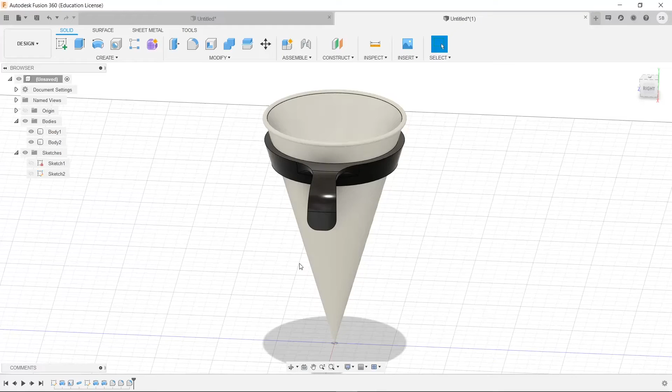Hey, I'm going to be showing you how to make this in today's video.

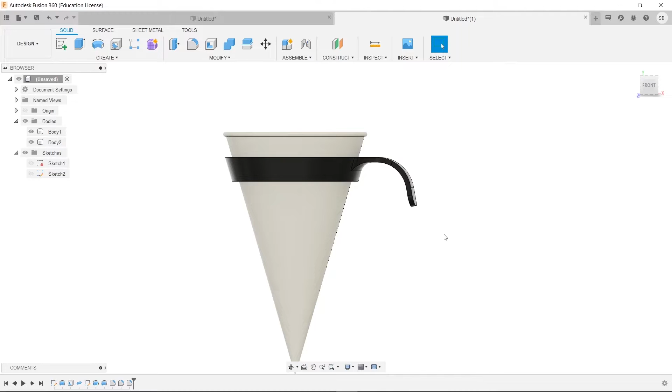Let's get into the video. Hey everyone, this is Stevie here, and today we're going to be making a handle for this paper cup. You guys have probably seen these before, and they are pretty annoying because they are super flimsy. So let's make a little holder with a handle that we can actually use with these things.

First, we need to actually make the cup itself so we can design it off of this. If we look at this from a cut from one side here, then it's just a triangle. That's pretty easy, right? It's a triangle with one side of 30 millimeters, and then a height of 100 millimeters. We don't know this length here, which doesn't matter, because what we're going to do is make the height.

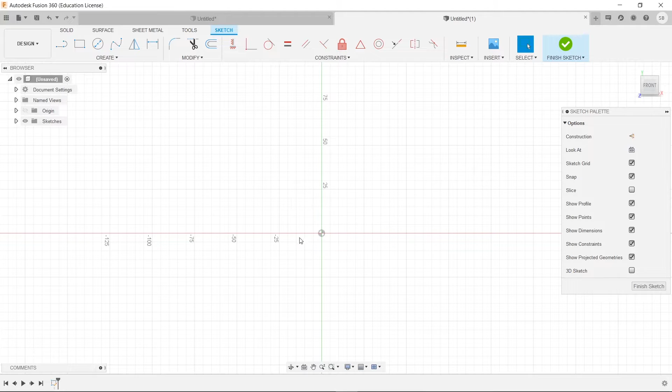Let's start at the origin. I just like that for some reason. We'll make this 100. We will bring it out by 30. And if I can click correctly, 30. Then we will finalize it by selecting here and here, and there we go. Now that is our cup.

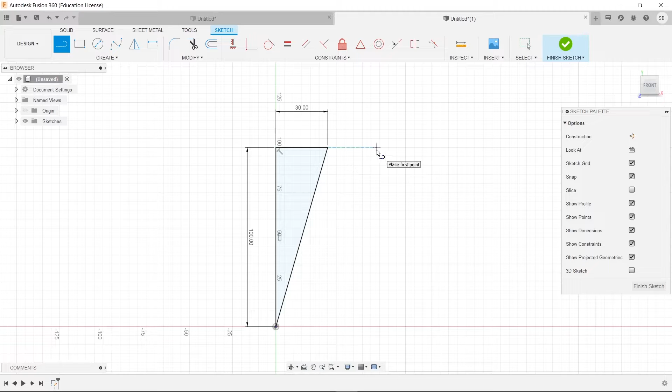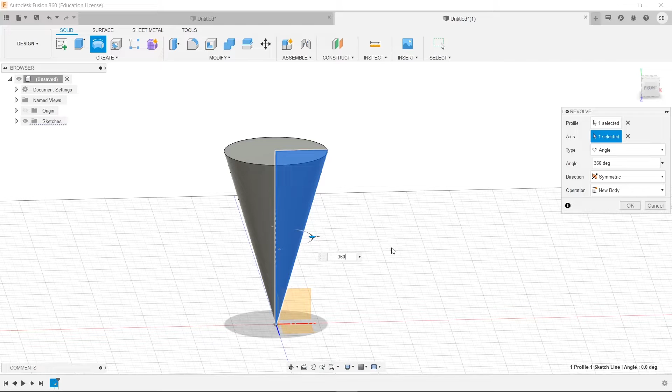Well, obviously not. There are a couple things we need to do before we can actually think of this as a cup, but we'll finish this sketch for now. Now we're going to click on the Revolve button, select here, and select the axis, making it this line right here. I'm going to select that, and we'll type out 360 degrees because that's a full rotation, and press enter. Now it looks like a pointy hat.

It's a cone. So what we need to do next is shell it so that it's a cup, not a cone. So we'll click here, and type out 1 millimeter because these things are super thin. It's probably even thinner than that.

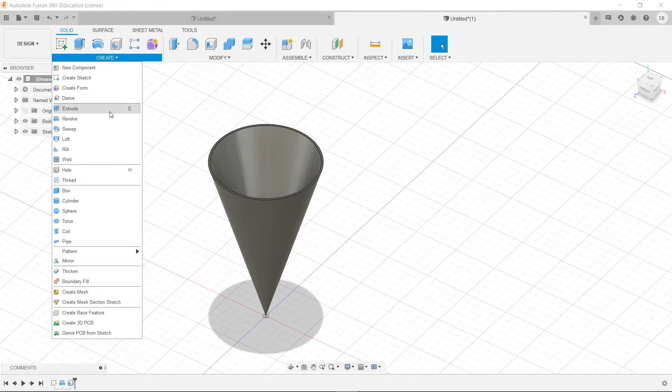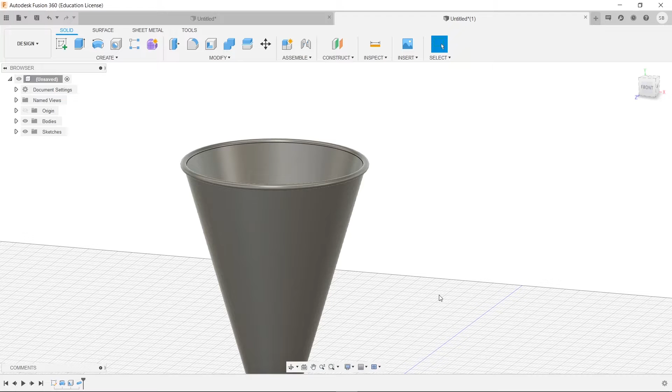Now finally we can make it a little bit more pretty by clicking on pipe here and selecting this path, whichever side, doesn't really matter. We want to join, so we'll join. And we want to increase it so it has a nice little lip there. That's pretty extreme, so we'll go to 2 and press enter. And there we go, that looks just like those paper cups now.

Maybe a little bit more gray, let's change that real quick. I want to make this body, we'll press A for appearance, right? Oh, there it is, it's already up there, it's just hiding from us. So we're gonna go down here, plastic looks good enough to me, so we'll make this plastic white. Perfect. So next thing we need to do is actually design the handle.

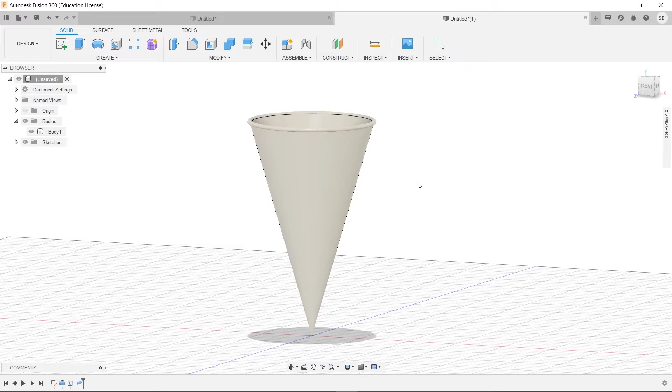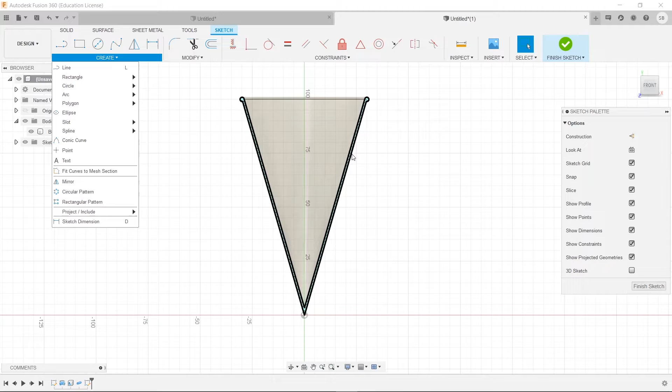I know the cup took like half a minute to do, but let's make the handle. So we'll create a sketch on this plane again, and we're going to click on slice here. This is going to let us see the midsection here because we selected it on a plane that's in the middle of it. So what we want to do, to be able to actually use these lines, is go here to project/include intersect.

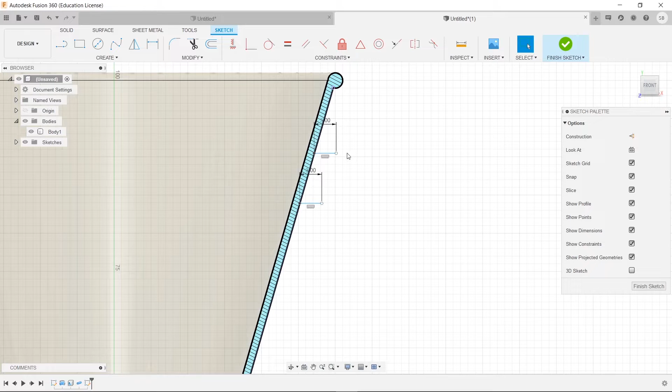Now we're going to select this, and that's going to allow us to use these lines to draw on. So what we want to do is go here and draw this out. Let's make this 3. We will do this one more time down here, make it 3 again, and then we'll want to connect these two.

So now that looks really short, so we're going to dimensionalize this. We're going to make this 10 at least. Now we could have just done this and made it so that they're both the same thing.

Oh, didn't take though. See that f of x right there? That is saying that this is a function of this value. So what's going to happen if we change this, then that one changes as well because it's a function of this value. Whatever this value is, this one will be it as well. So we're going to move that over there.

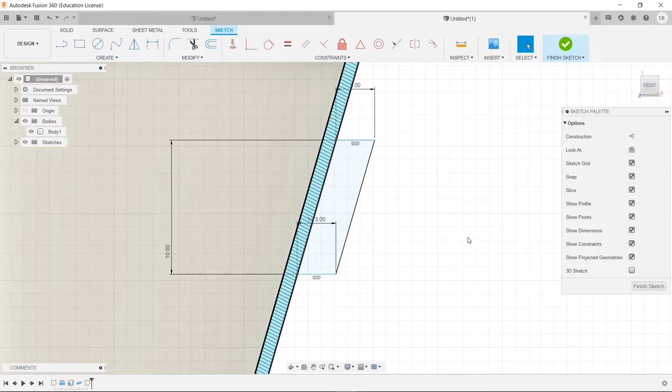Next thing we're going to do is we're going to create the actual handle, because this, you can imagine, just how we drew it as a triangle, this thing is going to revolve around and be the holder of it. And then we need to have a handle that extends from here so that you can actually grab it.

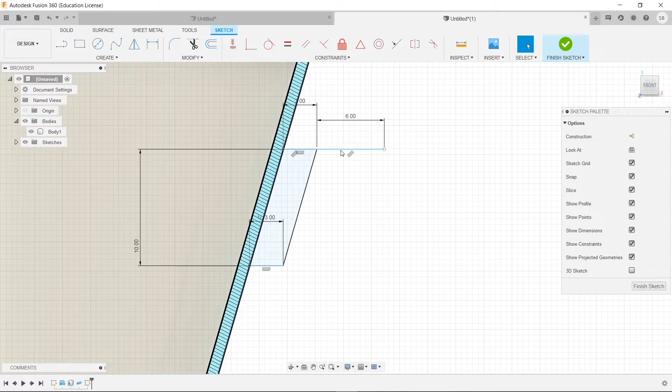So what we will do is type out 6, and then we'll click on a line again. And if you hold left click with line, I don't know if you knew this, but you can actually draw an arc. So we're just going to draw out an arc, and then we're going to make that arc tangent there. Actually, I don't like it when those things are tangent. We'll make that tangent later. So we'll draw him out there.

So next thing, we want to make the radius of this. Oh, not that, Control Z. I want to make the radius of this to be 15.

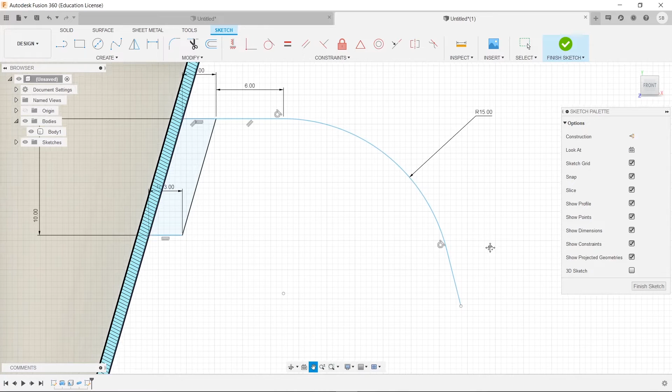Interesting, but we're going to make this tangent now. There we go. And I want to make the distance between this point and the bottom of it. Oh, nope, I was holding on tangent still. My bad. So we're going to make the distance between this point. We're going to make that 20.

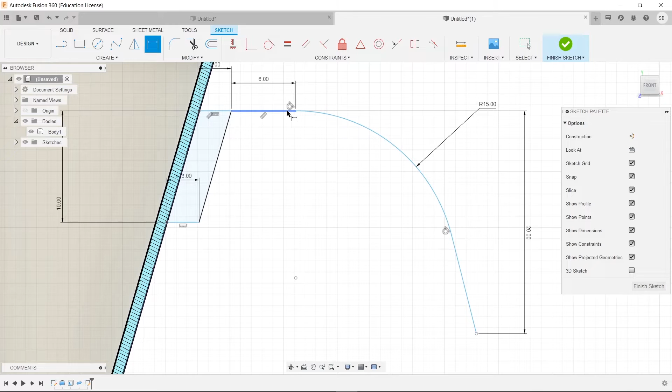And now we need to actually make the angle between these two. Let's make that 100, make it a little bit nicer. And we need to finish this off because it's not a solid object or sketch right here. Like you see this one, that's obviously something, and we need to make this into something as well.

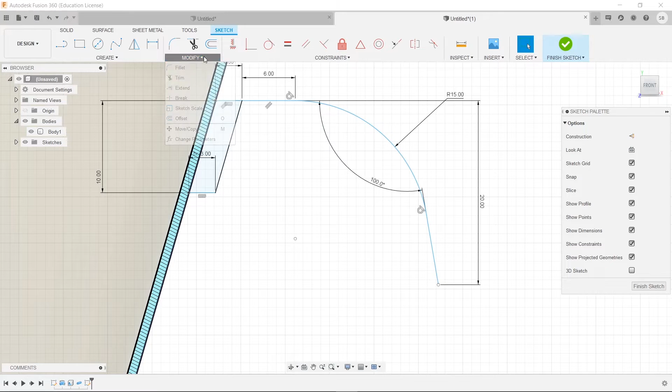So what we're going to do is go to modify, and we're going to offset this. Now this allows us to type in -3, actually -2, that's pretty thick, and we're going to make the handle something. Over here you can see it doesn't touch, and if we try to move this, it moves the whole thing, so we're just going to Control Z that.

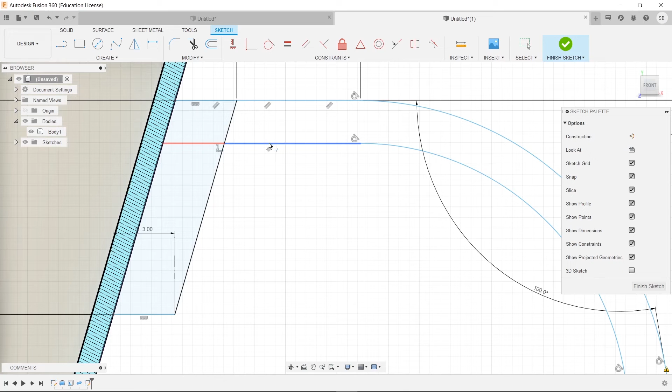So what can we do? Well, we can go to modify, and we can go to extend, and we're going to click on this, and there you have it. Now it is coincident, and it is extended to touch. Now finally, we need to connect these two points here, so we're going to do one more line connecting between them, and there you go.

That is it. That's it, guys. We're done. Well, not quite. We need to do one more thing at least. So we're going to finish this sketch.

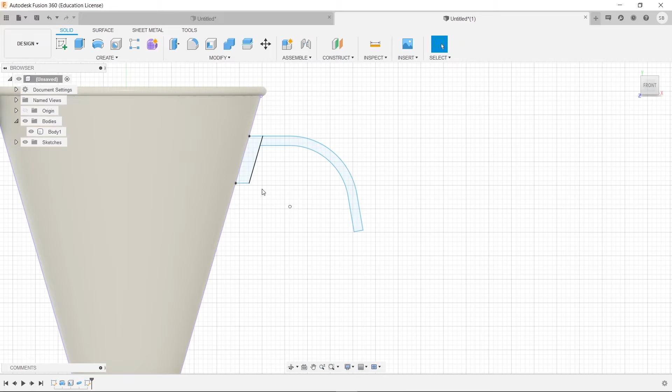And now that you see this nice handle, which frankly is really large compared to the holder itself, we can go back and change a couple things if we wanted to. So we'll actually make this revolved, and then we'll make changes once we see what it looks like.

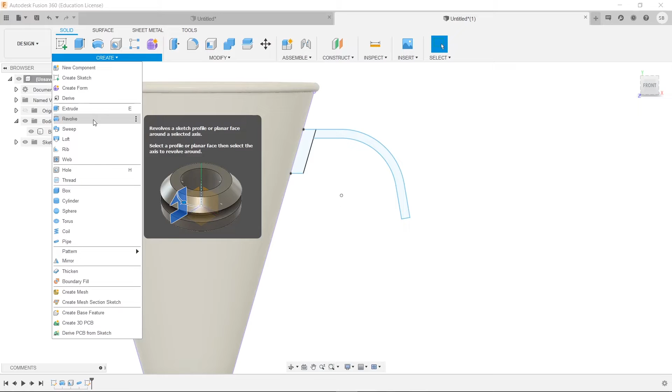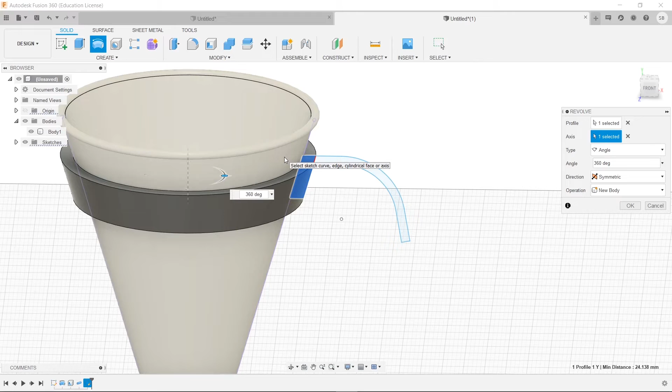So we are going to go down here, and we're going to choose Revolve. We are going to select this guy right here, and we're going to choose the axis of rotation to be the green one right in the middle, and we're going to type out 360 degrees because that's one full rotation. But you see how it's already white? We don't want that. We want it to be a new body. If we didn't, then this would all be one piece. So we're going to choose new body and press OK.

Now wait a second, we can't revolve it again. It's missing. If we revolve, there's nothing to choose.

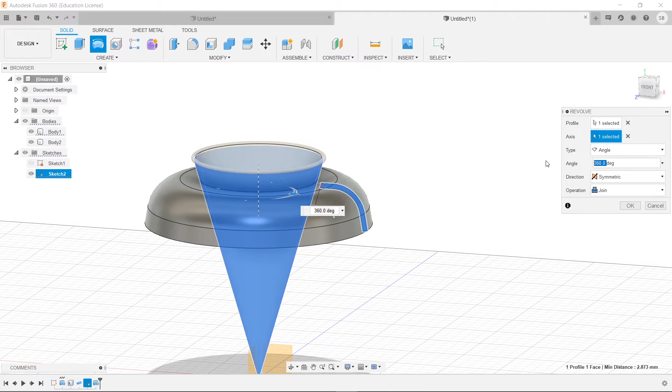Well, let's go over here to sketches, and we'll turn on our sketch again. And now we can actually revolve it. So we're going to choose that one, select our axis, that little green line in there again, and then we are going to choose symmetric, but I want it to be like 7 degrees. There we go. And if you didn't notice when I was doing it, I did choose join here because I do want this to be joined with this one. So we're going to press OK.

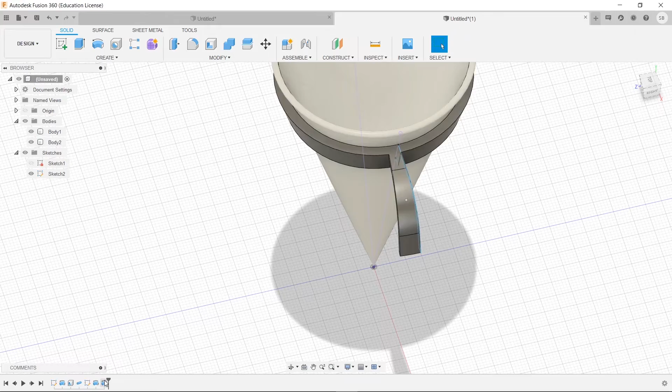And then, you know what? Now that I see it like that, it's not that ridiculous. However, it changed it. It's not actually symmetric, so let's go back into there. We'll go into here once more, and we will choose symmetric, and that looks much better. That's not that ridiculous now. That looks like a pretty good scale, actually.

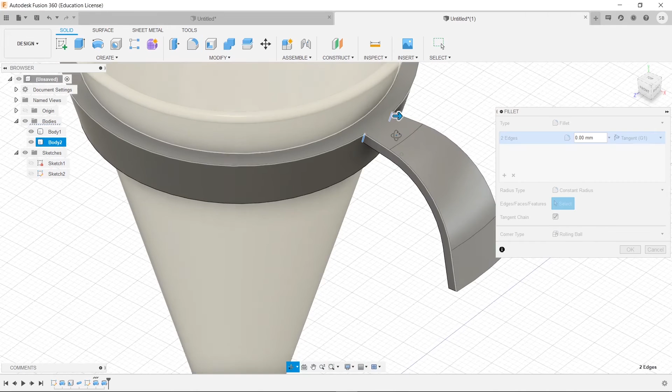So, one thing I want to do, let's turn these off. I want to make this a little bit nicer. So we'll go here, and we'll fillet this. So we're going to drag this out. Let's do like 15, is perfect. And then we'll go under here, do the same type of thing, just to make it a little bit nicer to look at, because we are going to 3D print this, because I think that this is a pretty cool thing.

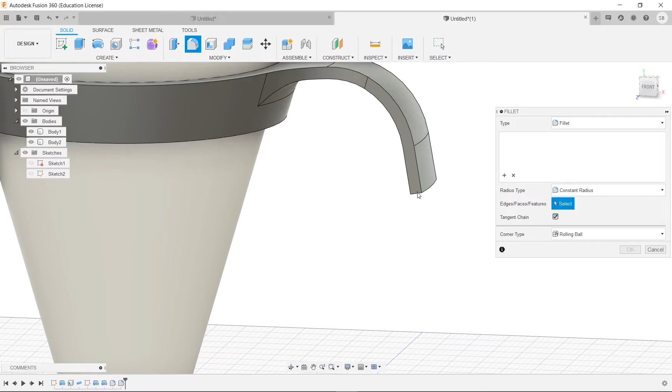So finally, let's fillet this once more. We'll choose these, nope, there we go. We'll choose these 2 corners here, and just make it look pretty, because that's pretty much what filleting is right now, right? Just make it look pretty. So there we go. That is the handle.

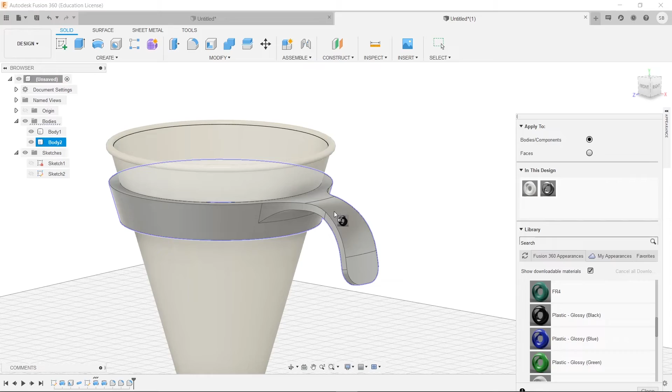If we wanted to, we could press A and choose this body. Press A. Oh, again, it's not coming up for us. It's already over here. So we'll go to plastic once more and choose that one. I like the black plastic. And look at that. We have a nice handle for our paper cup. We just modeled a paper cup and created an ergonomic handle for it, all within 10 minutes. I think that's pretty neat.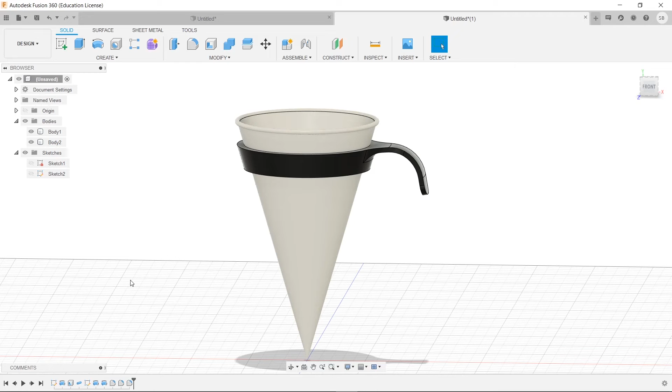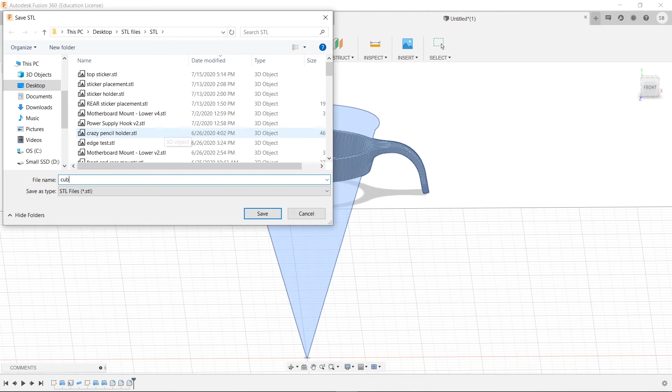Now the greatest part about this is we can actually save this as an STL and use our Mantis 3D printer to print this file. I think that's pretty cool. So the way we can do this is we'll right click on the unsaved up here, and we'll hit save as STL. You see it selected everything, we actually have to deselect that body because all we want is this guy. So we're going to press OK, and it's going to ask us to name this. So we're going to just name this cup handle.

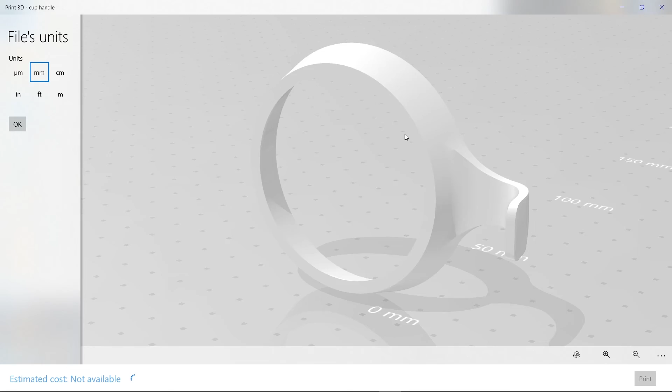So we'll shrink this guy real quick, and let's check out that STL. Just make sure that it saved what we wanted, so we'll go and find it. And using Microsoft's Print 3D Viewer, we're just going to take a look at it. And there you have it. That is what it will look like when it's 3D printed, or at least pretty close to that. But that's pretty cool, so let's do this.

With our Mantis 3D printer, it's as simple as going to our Mantis tab, selecting our file that we wanted to print, and go to our STL files, and then we're just going to find that one that we just made, and we're going to print it. And there we go. I literally don't have to do anything else. The Mantis 3D printer will take care of the rest of it for me, and all I have to do is wait for my new creation to come out.

That's the great thing about the Mantis, is we don't have to mess around with settings or anything. All you have to do is print with it. That way we can focus on the design aspect of our lives, and we can actually improve our lives rather than wasting time trying to fix little settings.